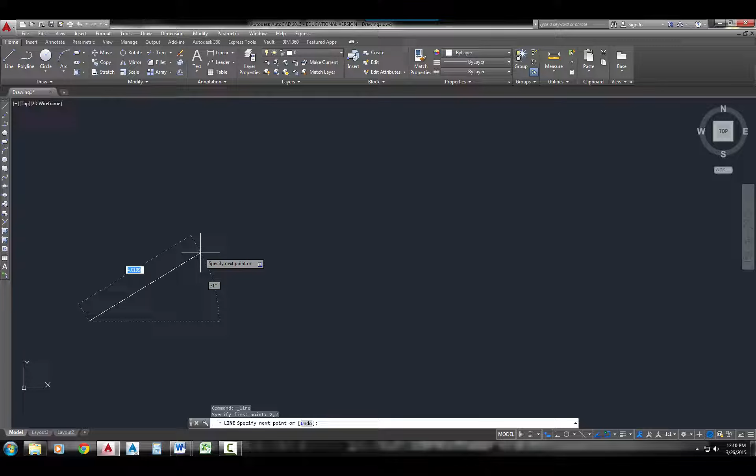The next thing I'm going to do is I want to type in an absolute coordinate to draw the next point of that line. When you have dynamic input turned on, it does not assume that the next coordinate that you type in is absolute. It assumes that it's relative, and we'll talk about relative next.

But to make a coordinate absolute, whenever you're typing in commands in AutoCAD, you're going to put in the pound sign. That pound sign tells AutoCAD, okay, we're going to start back at 0, 0 again. And we're going to type in the coordinate. So 10, 2. And you can see I made a straight line. So it came over 10 on the x-axis and up 2 on the y-axis.

I'm going to do it again with the pound sign: 10, 8. That one came over 10 along the x, 8 along the y, starting at our origin, which is 0, 0. So that is the absolute coordinates.

The next option we're going to do is relative coordinates. With a relative coordinate, I'll start the line command with the toolbar. The first point that it's asking for has to be an absolute coordinate, since every first point you give has to be absolute because I don't have any relative coordinate to come from. So I'm going to type in 2, 3. That first point is coming from 0, over 2, up 3.

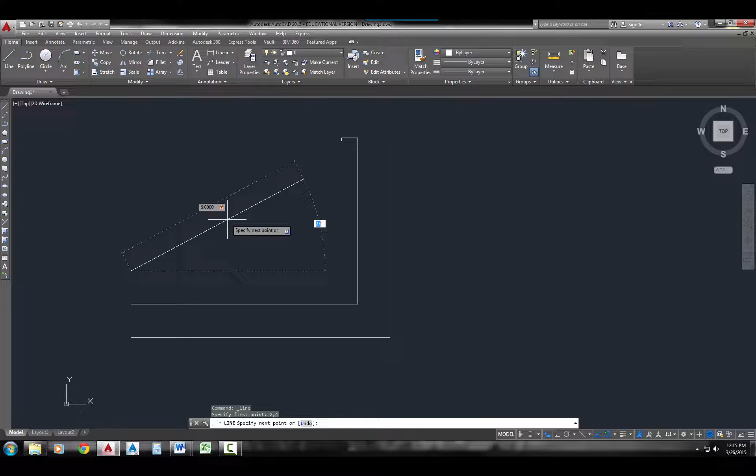So all I have to do right now is just type in my distance - how long do I want that line? I'll type 6, and then I'm going to press tab. Notice how my 6 got locked in - you can actually see a padlock. No matter what angle I try to make this thing at, it's definitely set at a distance of 6. I want the line to go straight like the others, so I'm going to set my angle at 0, but you can type in whatever angle you'd like.

And then again, I'm going to draw another line. This one is going to be 4, tab, 90 degrees to make a perfectly straight line. I'm done with this command, so I'm going to press enter to end the command.

The next step that we're going to do is direct entry, and this is actually how you draw most of your lines. It's good to know what a relative coordinate, an absolute coordinate, and a polar coordinate are, but how we actually do our drawings is we'll start off with an absolute coordinate, or just click where we want it to start, and then use direct entry.

With direct entry, what you're doing is you're actually just pulling your mouse in the direction that you want to go, and typing the distance. So I'm going to use the line command. I'll just type in the word line at the command line.

For this one, I'm going to start my line at 2, 5. You can really click anywhere; I'm just, for the sake of this exercise, keeping it uniform. So I'm typing in 2, 5. And then notice I can just pull this in any direction that I'd like to go and specify a distance.

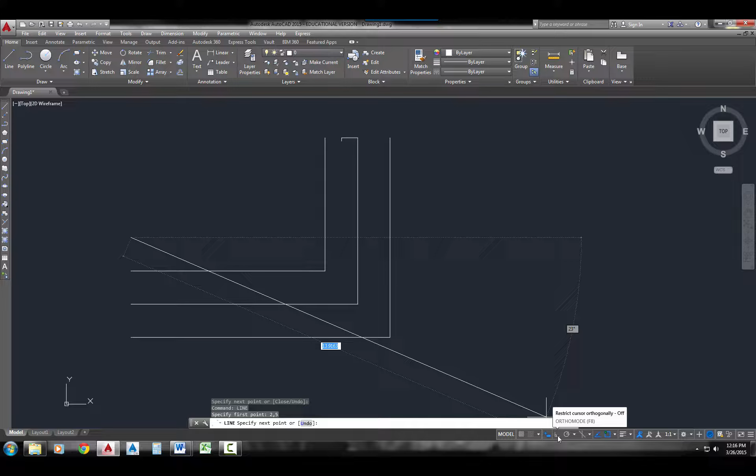One thing I'm going to do now is turn on my ortho. You can either click this button down here, or press F8 on your keyboard. What ortho does for me is it ensures that I make a perfectly straight line, perfectly horizontal or vertical. It follows my cursor, so whatever my cursor looks like, that's what my ortho is locked into. I can't make an angled line even if I tried to right now. I've only got 0 and 90-degree increments.

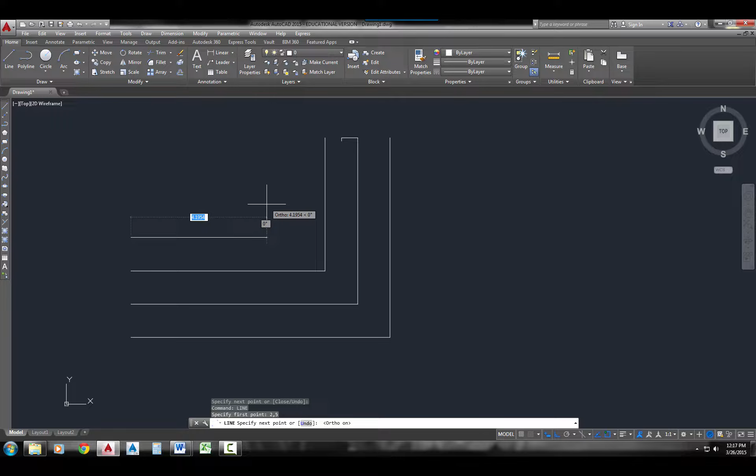So I'm just going to pull it over. This is direct entry, so I'm just going to pull it over and type the distance that I want to go. So I'll just type in a distance of 5, pull it up, type in a distance of 3, and I'm done drawing. And I've just drawn a line using direct entry.

The last thing that I want to show you, I'll still use direct entry, but instead of using the ortho command, I'm actually going to show you how to use polar tracking. So I'm going to start the line again. This time I'll just do the L enter. My start point, I'm going to type in 2, 6.

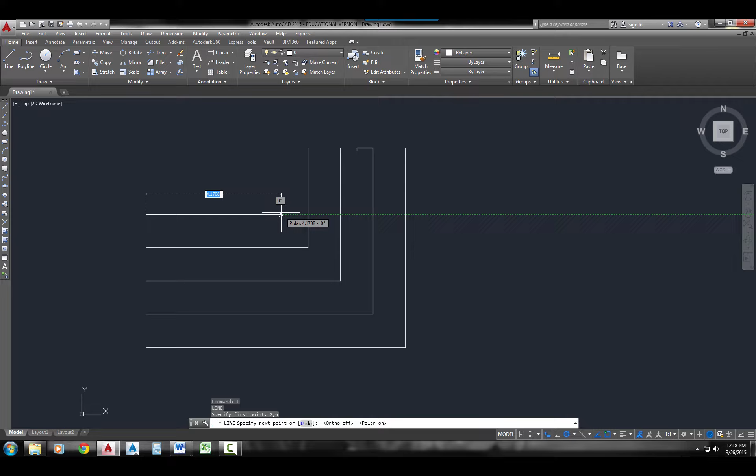Right now I still have ortho turned on. I need to turn off ortho, and I can turn on polar. What's nice about having polar on is look what happens. I can make a line at any angle that I want, but as I get close to angle 0, do you see that green line? It kind of guides me; it sort of snaps me into angle 0. AutoCAD is just assuming if you're that close, you're probably wanting to make a straight line. So it helps you to make a horizontal line, but it doesn't lock you into it the way that ortho does. I can still make any angle I'd like, but as I get up into 90 degrees, I have the option—it kind of snaps me into having a perfectly vertical line.

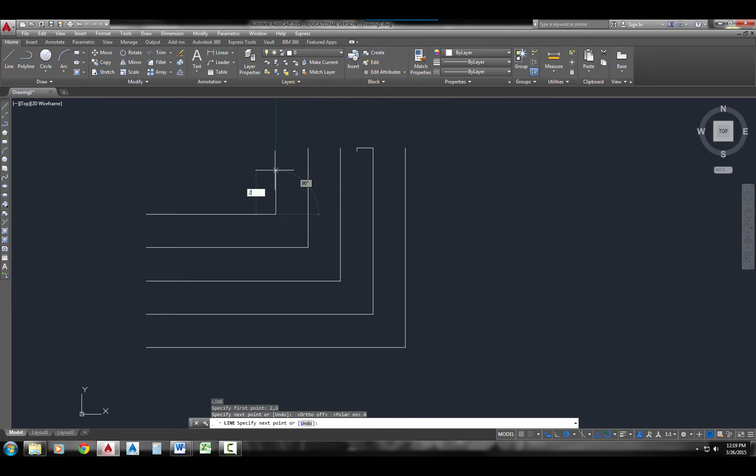So still using direct entry, I'm just going to pull this off to the side, and I'm going to type in my distance of 4, pull it straight up, type in my distance of 2, and press enter to end my command. And you've seen now all the different ways that you can draw lines and the different input methods that you have for drawing lines in AutoCAD.